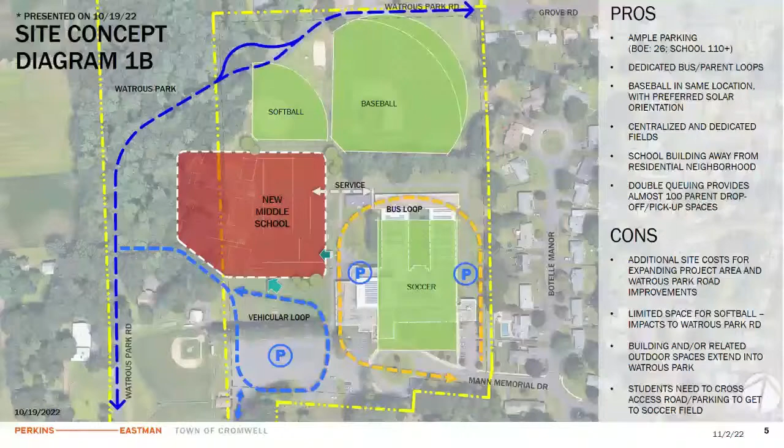As a refresher, there are 3 grades: 6, 7, and 8. Within each grade, the teaming structure has 2 teams, each with 3 core classrooms, a world language room, 2 science rooms, a prep room, a special ed resource room, and then down at the bottom you have some floaters, some intervention rooms and other classrooms.

When we do an overall square footage check on these plans, they're pretty accurate. We have thicknesses of walls accounted for, exterior thicknesses of walls. Understanding the sensitivity of how large or how small, how tight this building has to be, we still love to carve out some pretty efficient collaboration spaces.

We're thinking at the ends of corridors, we could picture a nice little window seat overlooking the park, where kids can break out and pause, where they're not in the way of traffic but it's a space they can utilize. We're always thinking of connections to the outdoors and outdoor learning opportunities. This academic neighborhood diagram, you'll see it a lot in the plans. It kind of repeats itself in a similar fashion, so we want to make sure we have a good understanding of this.

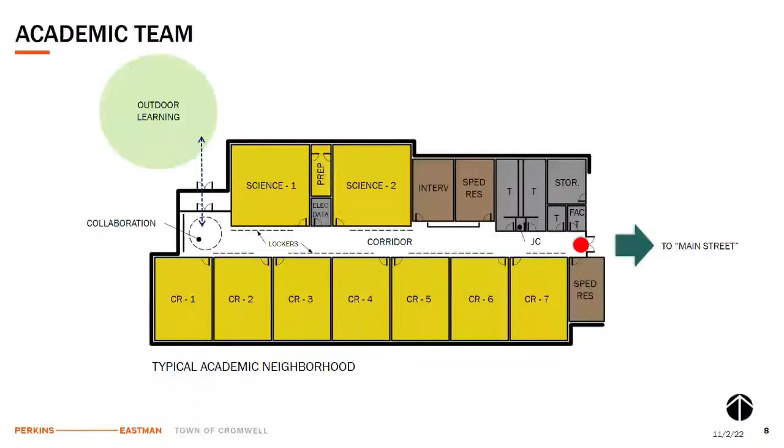Let me jump ahead to concept A, because I think that's really the basis. They vary depending on the layout, but generally that's what's included in a typical grade, right?

Yeah, so concept A is a progression of what we started with in the interview when we first met. We think there are some strong ideas in that concept, and this is an evolution of that. We're fine-tuning the program, right-sizing everything. This is to scale, and I think we'll spend a little more time on this since the other options will go a little quicker because there's a lot of similarities.

The main idea, we talked about that public and private diagram. So all these dark blue areas, which are kind of hard to read on the screen, you have your gymnasium up front, your auditorium in the center with band and choral and music spaces tucked behind. Then at the top you have your cafeteria, food service, and custodial and mechanical spaces.

We tucked the cafeteria up on the top of the page. It's north-facing, and I think there's some great opportunities for natural light there, without getting that blinding light and heat gain in the space.

Also, deliveries using Watrous Road, bringing them down around the back, keeping the delivery vehicles out of the bus drive, the parent drop-off, and the parking areas, I think is a really smart idea. And then the gymnasium...

We see this space has the largest number of spectators and people that can get packed into it, so it's going to have the largest egress requirements. We want it to empty out into the largest part of the corridor, right near the front door, because we're going to have to have a certain number of doors and a certain width at the front door to meet code and egress requirements.

So this would be shorter, and I start about halfway down the corridor because on the other side there's like 10 classrooms in a row. And if you're looking at it compared in scale to, say, the auditorium and stage, it's really just 2 auditoriums put together, which is not bad if you think of it that way.

On the very first page, I put a 3-foot door in there for scale - I think that helps to understand it's a comfortable length. Like I said, Ken's comment about bringing back that slight angle and shaping that space a little so it opens up and brings some more light in is a great one.

I agree with Ken, I'm not a fan of that interior corridor in option C. Oh yeah, question - courtyard, yep.

Question on option A though, with that service road coming between the school and the softball field - does that have any impact if those fields are being utilized for gym? Well, I guess it depends on the schedule of the deliveries and trash.

That's a good question. I think that road would also double as an emergency vehicle access road, but you'll never get cars on it. People aren't allowed to drive there, so it's just scheduled deliveries and trash. Right now the trash does cross there onto the field, but they come twice a week and are there for 10 minutes.

It also looks like, based on the floor plan, if you're in the gymnasium you'll exit to go to the fields between the band and the mechanical room. So if you exit that way, you'll avoid that road.

I think I'm with you, I prefer A over B. I like the idea of the gymnasium closer to the fields—it feels like you have more parking options and more accessibility to those common areas. Maybe it doesn't realistically lay out that way, but I also like that the academic wings are into the woods, because it feels like a little security blanket.

I think it would have a calming effect, having the woods to look at instead of a parking lot. I agree—you won't have trees right up against the windows, but it's still a more calming environment, and anything we can do to calm the environment is a plus.

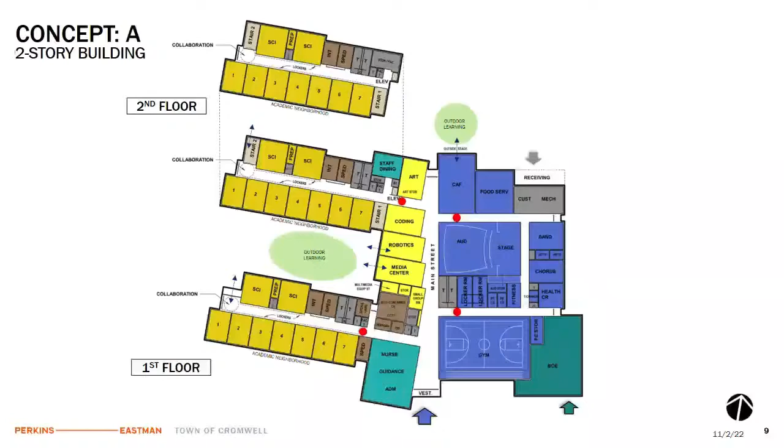Was it end of December, beginning of December? We were trying to have some better plans so that an estimator could work. What's the next major milestone? The next milestone would be right before Christmas, our schematic design set and narratives and package that would get estimated. So we're looking about 8 weeks from now, 7-8 weeks.

And then we'd move into design development after the new year, which would be about another 8-week phase, followed by the construction documents. So the completion of the schematic is about 7-8 weeks out.

So the schematic design is basically like the architectural drawing, but doesn't include all the plumbing and electricity and all that stuff, right? It would be like plans, elevations, basic building sections, typical wall sections. Right, it's what we would see if we're walking through. And then all the MEP, technology, security, that would all be in narratives.

Okay, we'll provide a basic package. And that comes after December? No, that would still be part of that package. Okay, all part of this package. So what comes after this package? What would be further developed?

The next phase is called design development, where we start showing more details. You'd get more drawings from the consultants, laying out the mechanical systems and basic layout. We start to look at filling in everything in the spaces. And then construction documents is really documenting everything for the construction. You get a lot more details, schedules, and more of the nitty gritty.

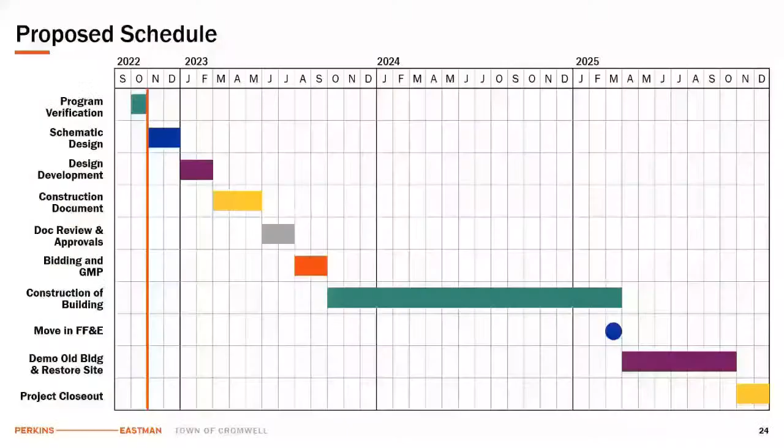No, full committee. So it feels like I heard positive comments for option A. Is there any discussion? If not, I'll take a motion. Sure, I'll make the motion to vote on concept A. Is there a second? I'll second. Is there any other further discussion? All those in favor of option A, please say aye. Aye. All opposed say nay. Nay. Anyone abstaining? Okay, motion passes. Thank you.

Next on the agenda is Arcadis.

Emily, thank you, just so we can get that on the record. So I am here on behalf of Jack, who's on vacation, as everybody knows.

As Rosanna mentioned earlier, there was a meeting held with OSCGR last Friday with Michelle Dixon. The approval for the recommendation has gone through. We did forward that language to Michelle, but have not heard back from her on either yes or no. Based on my experience, sometimes that's a good thing. If you hear something quickly, it's usually like she has an objection to it, but not hearing back is actually good.